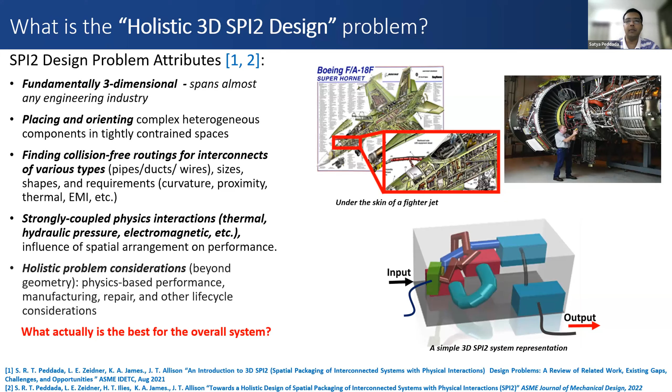Just getting into why is it a costly bottleneck across many industries? Current practice, if you see lots of industries, they have advanced knowledge and tools for simulation, design automation. But the thing is, for complex systems design at larger scales, we basically break up the problem into different parts. So is it possible to have, in 5 to 10 years down the road, simulation software or something where it can spatially package and find various configurations for a given system for different system performance metrics? Is it possible to do that? So that's something that SPI2 can offer.

The issue that happens with most of the industries is when it comes to actual design of complex systems, they depend a lot on manual decisions. For example, how do you make sure that you fit, take an aircraft, how do you assemble the aircraft? Lots of conventional methods are used where there's a lot of difficult things happen when you need to maintain or repair such systems, and you need to just throw away those systems if something is not proper. So how do you make sure that even repair and maintenance can be done properly and spatially packaged in such a way that all these different life cycle considerations are also met?

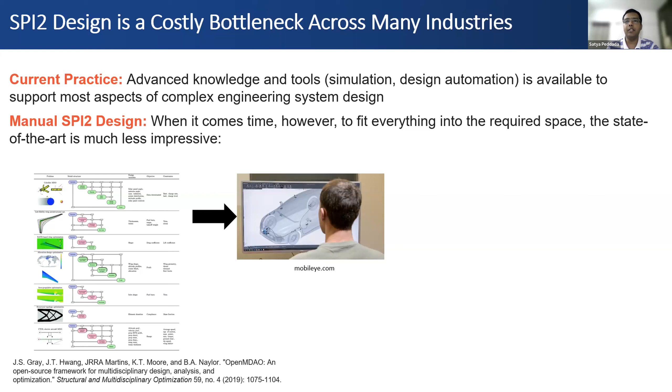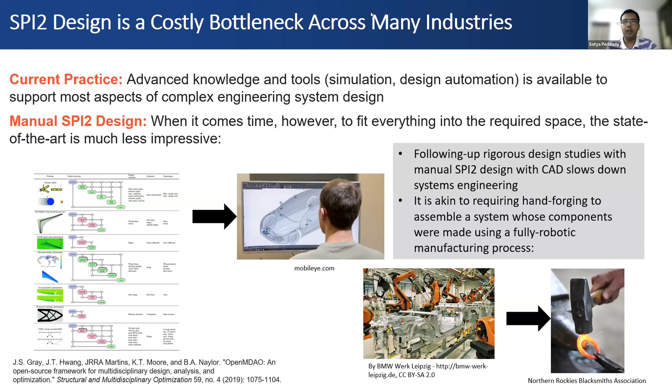At the same time, to conceive of different configurations of a given system manually is very difficult. The human cognitive space can only conceive of a few components and interconnects together, but when it goes to larger scale systems or complex systems with physics considerations, manual SPI2 design is really a bottleneck. And that's what we are basically facing nowadays. And for the current requirement of technology improvement, we need to have better softwares and better tools that can perform this SPI2 design research. And for example, why has the SPI2 design not progressed?

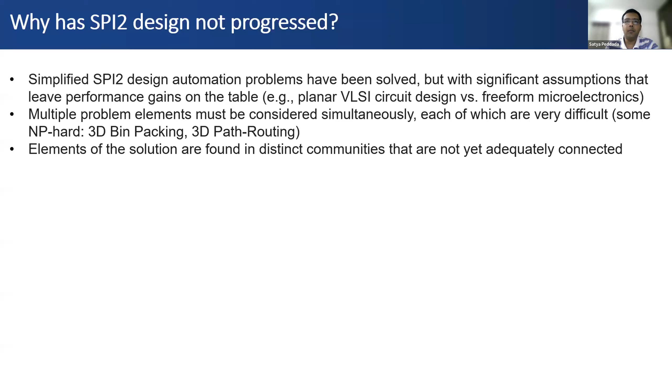Because most of the design automation problems which we solve are very simplified problems that have simple representations of the system, and also we don't generally consider multiple performance metrics together. Therefore, this is a very grand design engineering challenge. For example, considering both packing and routing together of components and interconnects is a very challenging problem, because packing, which is 3D bin packing, and 3D routing are NP-hard problems.

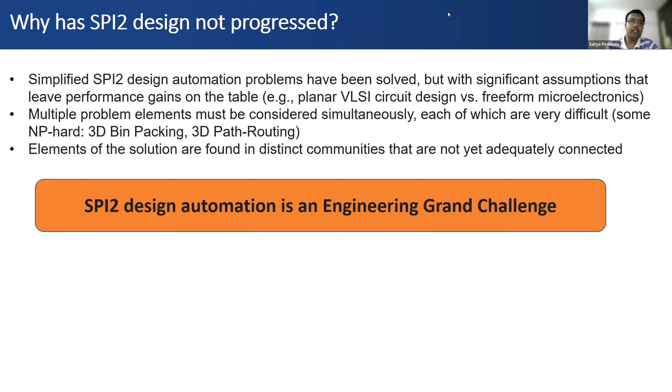Those familiar with mathematics know these are very difficult combinatorial problems. So how do you make sure that we find design representations where packing and routing can be done simultaneously? Both discrete and continuous ways of solving this problem are required in this case.

One good reason for optimism is that over the last few years at Illinois and with our partners, we found a method where we can represent a given SPI2 system, its components and interconnects in space, as a spatial graph. The advantage is you can represent components as nodes and interconnects as edges of that graph.

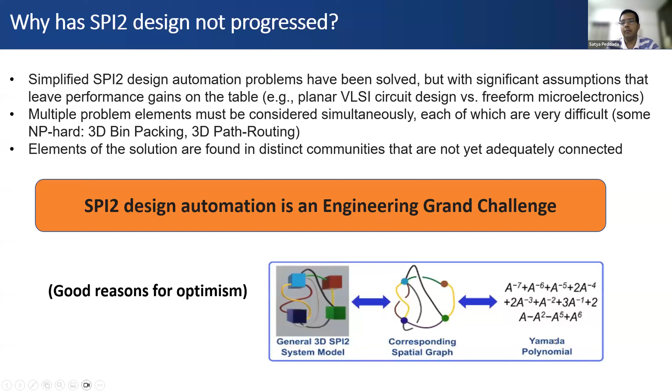That graph can be projected onto a 2D plane with crossings as shown here. Another advantage of this representation is it can be written as a unique polynomial, so you can enumerate various configurations of a given system by enumerating the graphs, and check if the graphs are isomorphic by comparing their Yamada polynomials, a mathematical polynomial from knot theory.

So this is one interesting way we have made progress in this design, SPI2 design automation.

Going back several decades, previous SPI2 design automation involved looking at the packing problem separately, work done by Professor Fadel and Professor Cagan, who are really well known in the design research community. From 1996 to 2008, packing and routing was studied extensively by Professor Jonathan Cagan.

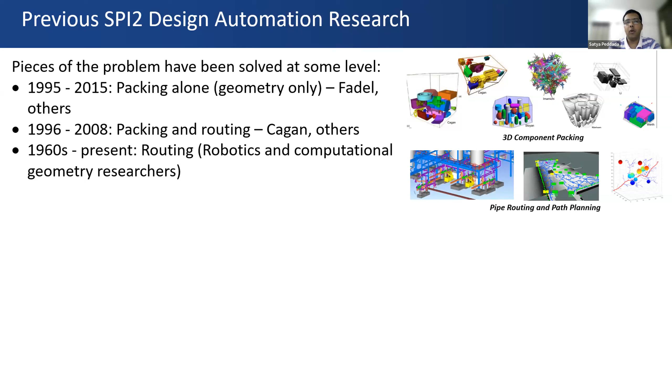From the 1960s, we have been solving many routing problems, both in robotics and computational geometry. But it's been solved separately in different cases like 3D path planning or chemical process plant layout routing, and interference problems, like non-overlapping of different components, 3D geometry interference problems, have been solved for decades.

What's now interesting is that from 2010 to present, we are seeing multi-physics topology optimization problems and geometry projection methods coming up. Professor Norato, who is also well known in this design research area, is looking at these geometry projection methods. One interesting point is that conventional topology optimization methods yield organic structures which are very difficult to manufacture.

But when we use geometry projection methods, those methods use stock materials like bars or solid objects as the primitives. When you do the topology optimization, the object shapes remain the same. That's the advantage with geometry projection methods for SPI2 design.

That's the connection: in an SPI2 design problem, you have components and interconnects. When you optimize them in space, as they move in space, optimizing overall area or volume with respect to physics, geometry projection methods work well since they preserve the shape of the objects and the shape of the tubes or interconnects. That's where we got inspiration to use that method for SPI2 design research.

I'll describe in more detail later why it's important. Each of these different independent problems, like packing, routing, physics considerations, and topology optimization, will be combined in SPI2 design automation research, which is what has happened in the past few years at Illinois. We are trying to solve this problem more comprehensively at larger scales for industry relevant systems.

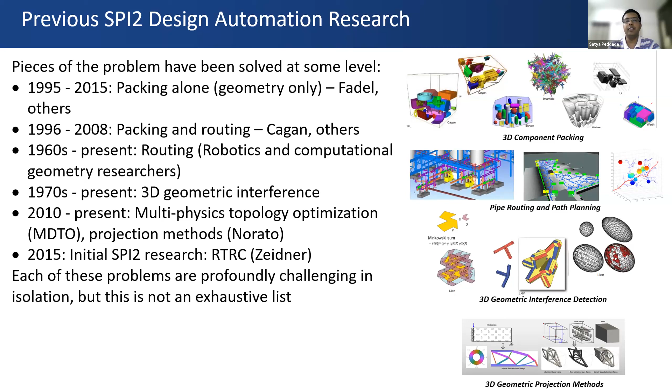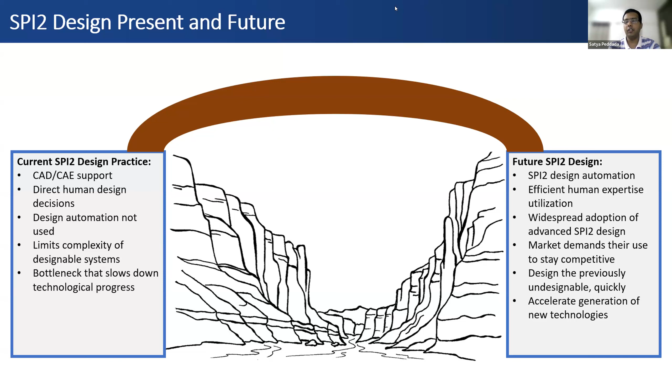But what we are looking into for the future is design tools for SPI2 that can support exploration of new configurations quickly and adoption of these tools into industry, which can accelerate the generation of new technologies and their adoption into the system. So there's a big chasm that needs to be covered quickly.

One design representation breakthrough we have achieved at Illinois addresses what makes SPI2 design really hard: you have continuous design decisions, which include how you place components in different positions while optimizing overall packaging area, what shape the components take, and how you orient them. These are all continuous design decisions.

At the same time, there are spatial topological changes. For example, if there are two interconnects, should one go under or over the other, or if there are hollow objects, should it go through or around them? These are discrete decisions. So how do you make sure you take care of all these decisions?

So you need a design representation that can support that. In knot theory, we have found something called spatial graphs, which can distinguish between two different spatial configurations. For example, on your left you see a spatial configuration S1, and S2 on the right. Both have the same connectivity, meaning the components connect to the same interconnects, but both have different spatial topologies. For example, interconnect 1 and 2 here are entangled, and unless you cut it, you can't get the new configuration like in S2. So these are the topological decisions I'm talking about that need to be taken care of while optimizing such systems.

And again, if you see another layout here, an interconnect is going from A through B to C, and there's another interconnect going outside this hollow object B. So these are again topological decisions that are discrete.

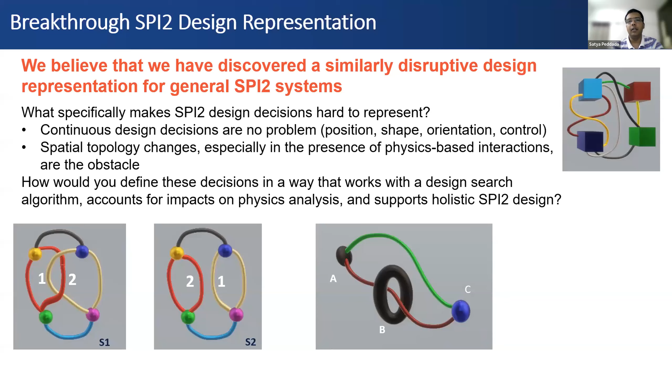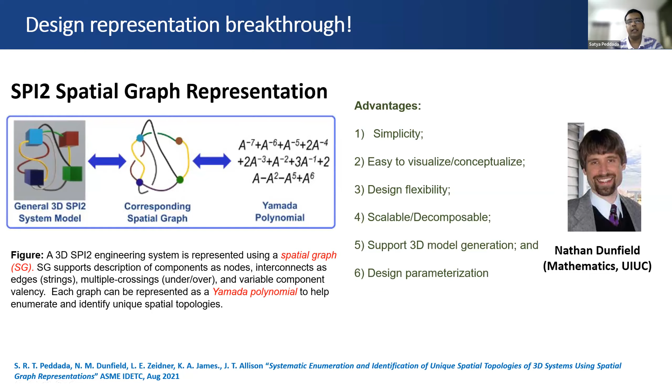So how do you make sure that while you optimize the locations of the components, you also find new configurations with different topologies? With the help of a mathematics professor at UIUC, Professor Nathan Dunfield, we came up with this design representation where we can represent a given SPI2 system with a spatial graph and enumerate all the graphs for the given system, and then optimize each of those graphs with respect to its spatial, physical, and other design considerations. So before we go into the two-stage framework, which is one viable framework—in the future there might be other viable frameworks for SPI2 design automation—this is just one example which we took in the paper that we explored a lot.

The main design optimization problem here has objectives that include system utility, for example overall volumetric density or the physics performance of a certain system, or other considerations.

And the constraints for an SPI2 problem are geometric and topological, functional, failure modes need to be satisfied, assembly and disassembly constraints—like how do you assemble the object when you're packaging it—and accessibility constraints, like is the component accessible for repair, and how do you make sure that constraint is met, and even manufacturability. Once you design a system, how easy is it to manufacture and put into production?

And the design decisions are, like I said, topological decisions, which are discrete. Continuous decisions include locations, sizing of the components, shapes, pipe sizes and so on, orientation, control of the flow of fluids, and other tuning parameters.

So this problem basically shows how lots of engineering disciplines need to be integrated in order to solve this very challenging problem together. This is just an example of how many disciplines we're currently integrating, with lots of researchers focusing on this problem as research goes in this direction.

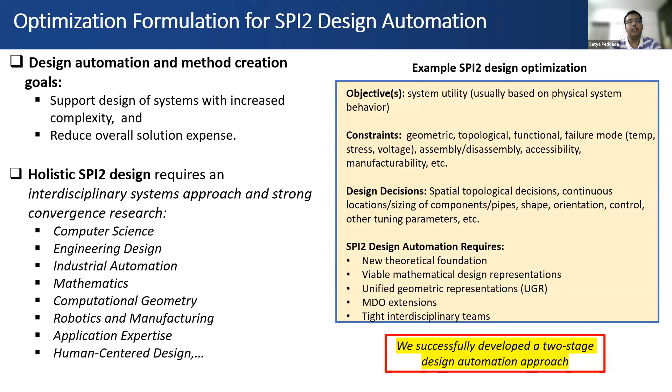Coming to one viable method to solve this SPI2 design problem: let's say we have a given system where a user provides the component shapes, geometries, and the connectivity of the system. What we do is, in stage one, we take the initial configuration and use spatial graphs to enumerate different discrete configurations.

And in stage two, we take each configuration and apply a geometric projection topology optimization method to optimize its overall volume with respect to physics considerations. So I'll quickly go through what stage one and stage two are.

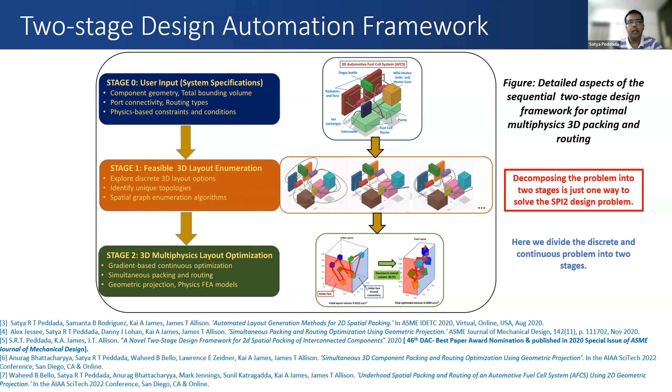The reason we separate this optimization problem into two stages is that stage one takes care of the discrete part, where we enumerate as far as possible different unique configurations or topologies. Then each configuration that is unique in stage one is taken into stage two for continuous multi-physics layout optimization. There's a journal paper in JMD that we published, where I'm the lead author, and you can look into that for more detail about this two-stage design automation framework.

In stage one, if you take a given configuration, what we do is enumerate it. One simple example is in this configuration you have different classes, and each class is a unique configuration. For example, class one—all these layouts are the same configuration, because this one has zero crossings, this one has one crossing, but if you just twist it in space, you get this configuration. So it's the same topology, but class 1 and class 2 are different topologies. Unless you cut the wire, you can't get this configuration.

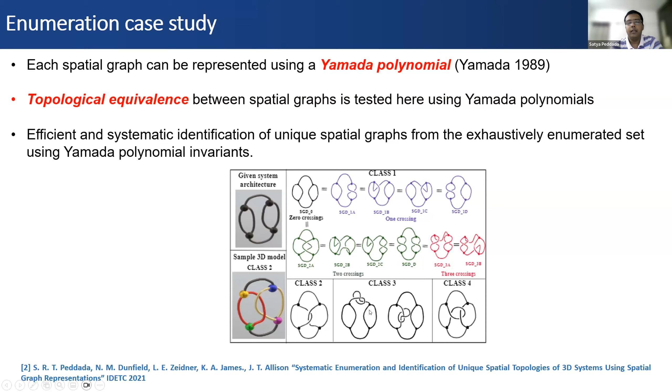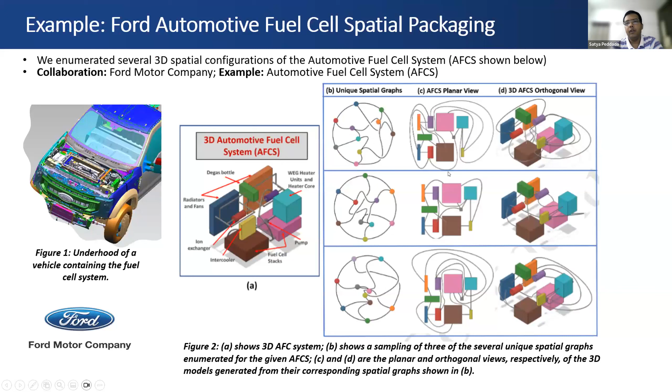So what we did is use some mathematical techniques to enumerate such spatial topologies, which are discrete, for each configuration. Then we applied it to a Ford fuel cell packaging problem. Here you see a fuel cell—we enumerated different spatial graphs of it, which are unique, and got different 3D configurations for each one.

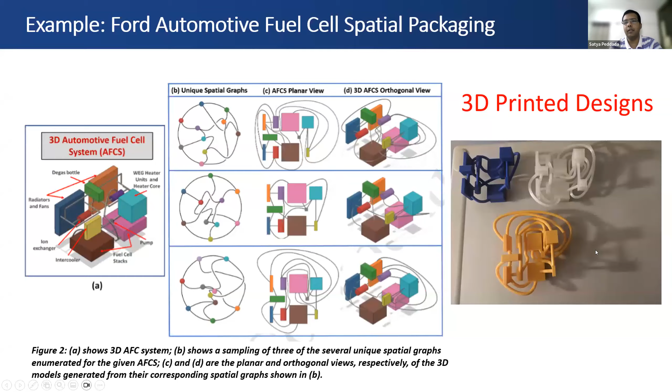Stage 2 is where once we get the unique configurations, we apply topology optimization using geometry projection. Conventional topology optimizations give organic structures, but what we want to do is preserve the component geometry in SPI2 continuous optimization. Geometry projection is a method where primitive objects, which are solids, are projected onto a mesh.

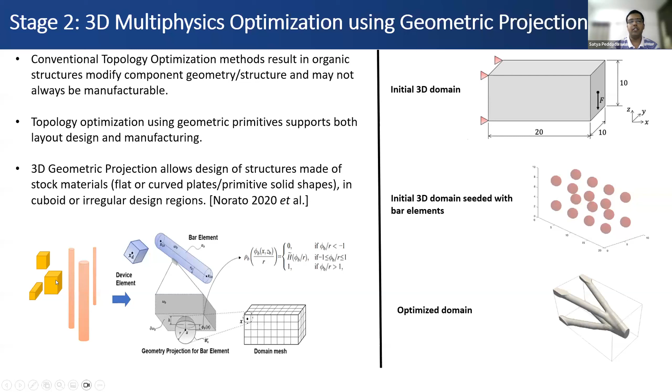For a SPI2 system, we have components and bars which represent the system. Here is a simple optimization formulation where we want to optimize the bounding box volume of a system, where intersections between different components and interconnects are made sure that they don't intersect. So you have device constraints, interconnect segment device constraints, and all other combinations.

At the same time, physics constraints, like making sure that no temperature of the device is going beyond limit, or head loss constraints are maintained when fluid is passing, fluid temperature, and all those things. So here is a very simple example.

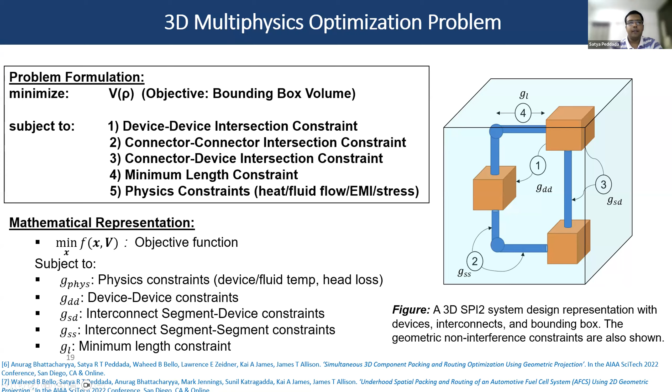I have more complex examples of real world systems, like I showed the Ford automotive system example. But here is a simple system where we take a 3-component system with interconnects, and then we optimize it with topology optimization method using geometry projection in order to get different layouts for different constraints.

For example, if the head loss constraint is 2.5 meters, it makes sure that it is met. And if there's no head loss constraint, you see components that are much closer to each other. Similarly, if you have an 8-component system, when you optimize it for head loss, you see.

Oh, excuse me, Satya. Please be kindly reminded, each speaker has at most 20 minutes. Sure, thank you. Yeah.

And so how far have I gotten? Yeah, I'll try to quickly finish.

This is a simple example of how the optimizer takes a smart decision depending on the constraints, what kind of result it gives. You can just imagine with components of different geometries and shapes and different interconnects, how we get different spatial package solutions. That's something I wanted to show here quickly with this example.

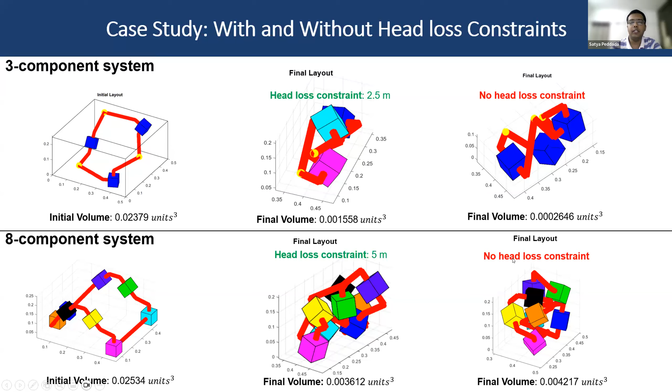Lots of details are there in the paper and other related papers with respect to SPI2 design research, so you can look at them. In conclusion, I would say that holistic SPI2 design automation is a vast research area that's currently expanding, cutting across multiple disciplines.

Here's one method which we presented that optimizes the component locations and the interconnect routing paths based on physics performance. But lots of other methods are possible which can be applied for industry-relevant applications.

Future research questions include what design optimization frameworks can be newly framed, how does the problem difficulty scale with respect to number of components or interconnects, and what kind of new parameterizations or representations are required, etc.

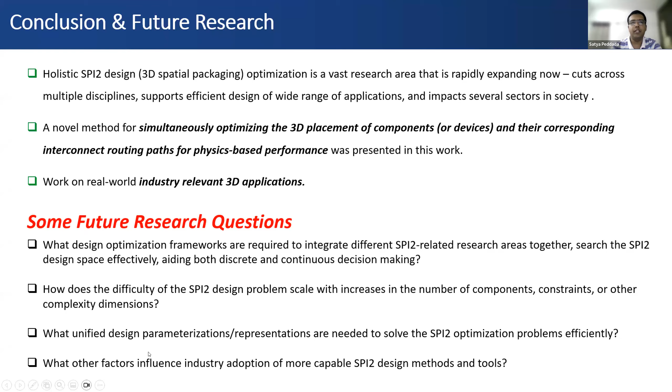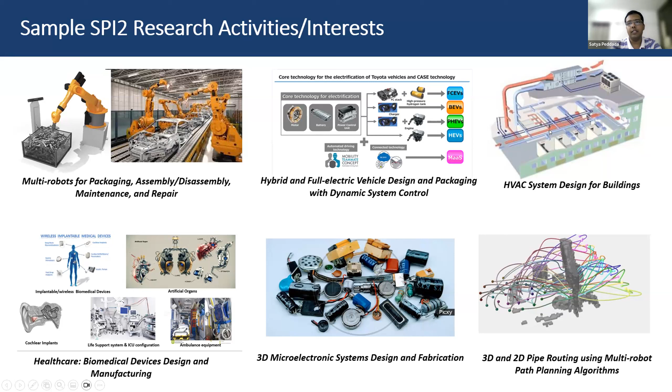As a quick snapshot of some SPI2 research activities at Illinois and its other partners, applications include various systems, microelectronics, HVAC system design for buildings. So it spans all over, even biomedical device design, etc.

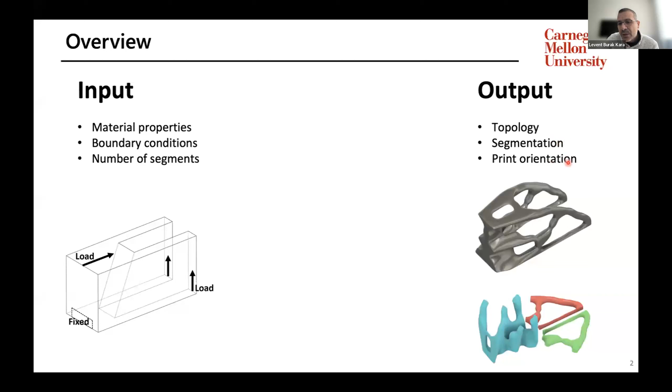This is in contrast to monolithic structures that are pretty pervasive in additive. But with these inputs, we are hoping to produce an output in which we have a single topology and a segmentation of that topology into however many segments the user has provided as input. For each of the segments, there's going to be a print orientation that is also an output. So in this work, the topology, the segments, and the print orientation for each segment are concurrently optimized rather than sequentially. So how is this achieved?

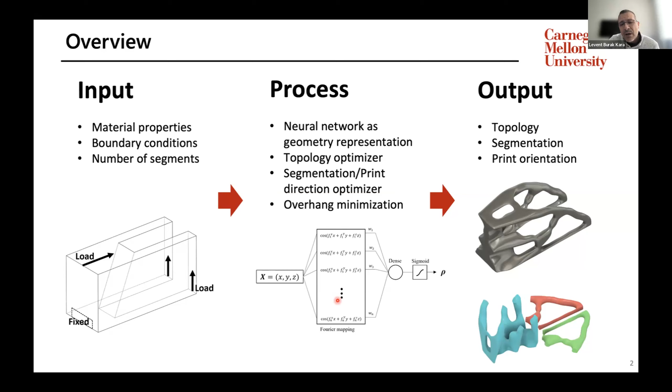We have 3 neural networks working in unison to produce a material distribution hypothesis that is then minimized across an objective function that we will talk about. Uniquely, we're using neural networks as a geometry representation. This allows us to decouple the complexity, the degrees of freedom in the design domain, from the difficulties on the simulation side of things, for instance the finite element analysis that's needed. So we have this decoupling that's allowed through the neural network, and we're building off of the ideas that have been presented in the last 3 to 4 years.

Our neural network-based approach is based on Chandrasekhar and Suresh's group in real-time topology optimization using neural networks. These neural network approaches are not a data-driven approach. Rather, these are online methods that basically take the given problem and then try to optimize a structure using the neural network as the optimization engine.

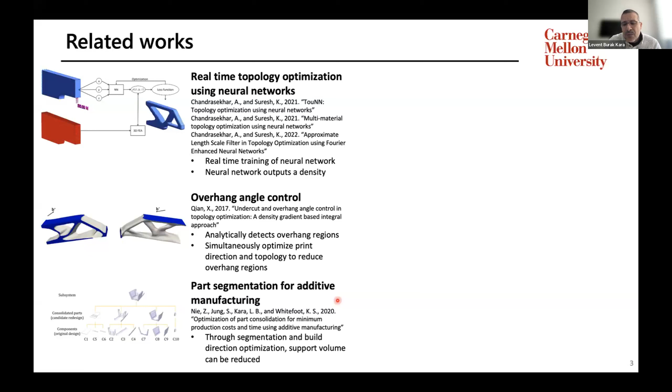There have been many works that try to design structures suitable for additive, primarily in overhang angle control, for instance, that minimizes the amount of overhang. We're also inspired by these works that try to minimize these quantities. Our past work in part segmentation for additive manufacturing is not redesigning the structures, but trying to find the proper segmentation, decomposition of an initial structure into its subgroups, and then optimizing their print orientation to create compact build volumes. So these are all pieces of work that inform the work we're about to present.

Also, topology optimization and its variants have been looking at using generative adversarial networks in order to produce topologies, and these are trained with previously established solutions. This work is in contrast to these data-driven approaches. Like I said, we're not using a data-driven approach, but rather an online approach.

Finally, there's existing commercial software that looks at some of the criteria that we're also interested in, like the total amount of support structure. However, these tend to be working for fixed orientations in the build chamber, and they're trying to optimize the support structure accordingly.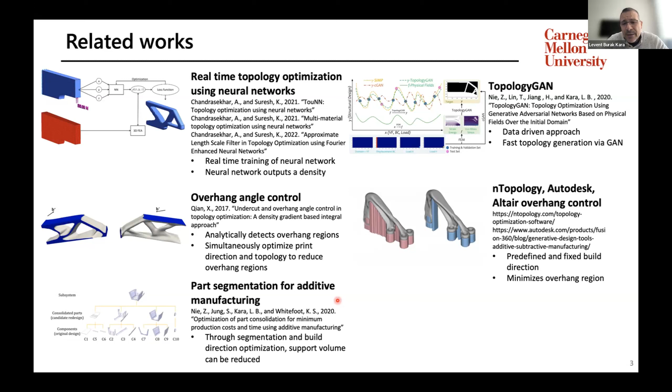The one thing I'll say is, even though our inductive bias is support structure minimization, overhang minimization, in real practical applications it is not always the case that one would want to minimize the support structures, because many times support structures can also be used as a conduit for heat conduction and so forth. But ours is kind of us taking a simplified approach to support structure minimization.

All right, so our work is primarily on this left-hand side, and we're kind of joining these works that were presented in the past by us and others.

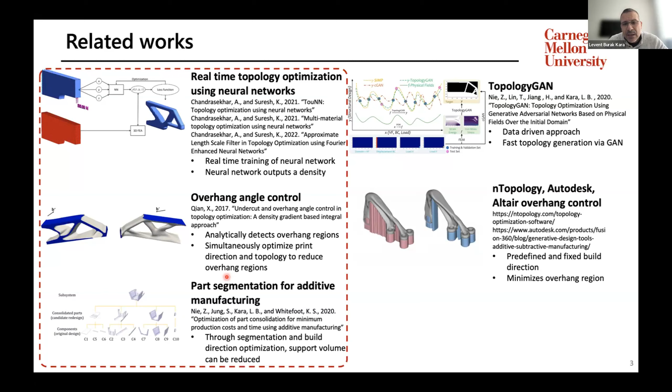Our main contributions, we believe, are an analytical solution to the density gradients that we obtain from the input-output relationship using the 3 neural networks. This allows us to create a fully differentiable pipeline where we have combined build direction, part segmentation, and topology optimization that is enabled. The different pieces of this architecture are modular. You can turn on and off different pieces, for instance to totally eliminate segmentation or prevent build direction optimization if needed.

Our architecture looks like this. Like I mentioned, it pulls together three different networks. The first network is a topology network that takes X, Y, Z spatial coordinates that we can sample in the Euclidean space, and then it will provide a density for each of the X, Y, Z points. So you can think about this as a material hypothesis generator.

The segmentation network looks very similar to the topology network. It takes as input XYZ domain coordinates, passes through a similar set of functions including Fourier layers, except it doesn't produce a density at the output, but creates a classification, basically a segmentation using the softmax layer for the segments. As I mentioned earlier, the number of segments is an input by the user, so it is not a number that is automatically determined by the system.

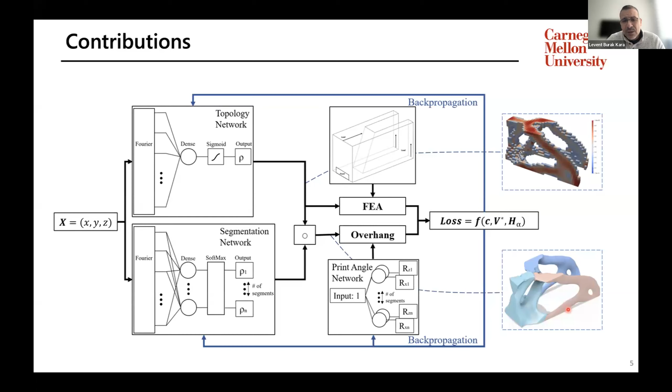So the two networks, the topology network and segmentation network, are inspired by these two great pieces of work that have been published rather recently. We're joining them together and then combining a print angle network to achieve this concurrent optimization.

But if we were to go under the hood in these networks, the topology network is using a Fourier layer to represent the geometry. Basically, for any XYZ point, we have multiple different filters, cosine and sine functions at different frequencies, that allow us to join their outputs through weights, linear layers, into a dense MLP. Then from there, we go into a sigmoid function to determine solid or void.

The segmentation network is using a very similar principle, similar geometry representation, but the last layer is a softmax layer that allows us to do some segmentation on any given XYZ.

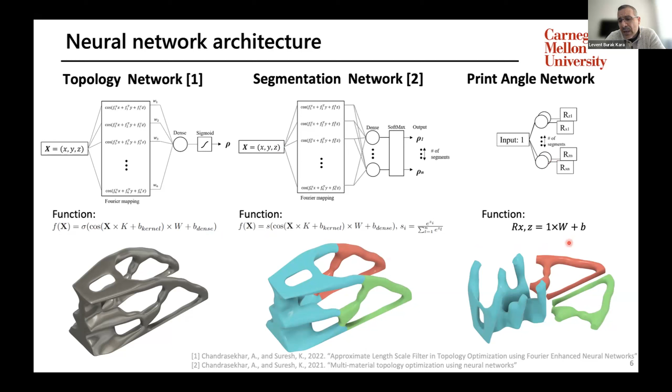The final network is the print direction optimization, where the input to that network is actually a simple bias term of 1, and we're optimizing the weights associated with the Euler angles in order to minimize the joint loss function. The mathematical details are provided here. They are very similar in the two networks, and the last print angle is actually quite simple.

We think an important observation and contribution we had was to show that the analytical gradients that we can compute throughout the topology network as well as the segmentation network, we got similar results if we were to use automatic differentiation. So the results you're seeing here with the red and blue arrows are the differences in automatic differentiation versus using the analytical gradients in the gradient calculations.

These two different halves are both aimed at finding the density gradient so that we can drive topology optimization. But this is just almost like an internal validation approach to show that the analytical gradients are actually valid in this case. However, in practice, we saw that it doesn't make a huge difference whether we use the analytical gradients or the automatic differentiation for density and gradient calculations. Performance-wise, they're actually pretty negligible. The differences between them is pretty negligible.

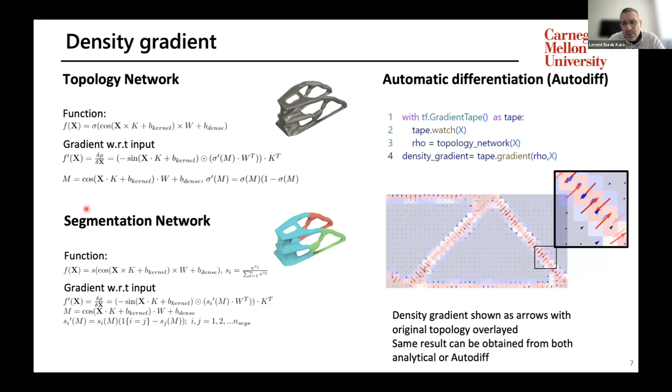At the heart of our computations for compliance, we used a SIMP-like approach where we are using finite element analysis that is applied on a mesh grid that is independent of the original XYZ points that the networks are taking as input. In fact, this decoupling of the geometry representation from the analysis domain is one of the unique features of this neural network approach.

And we're leveraging this previously presented idea. For passive elements where domain materials should not appear, we can enforce that with a simple L1 loss in the neural network, as well as creating symmetrical results. We also attach another formula that gets incorporated into the network. So symmetry constraints as well as passive element enforcement is rather straightforward with these neural network representations.

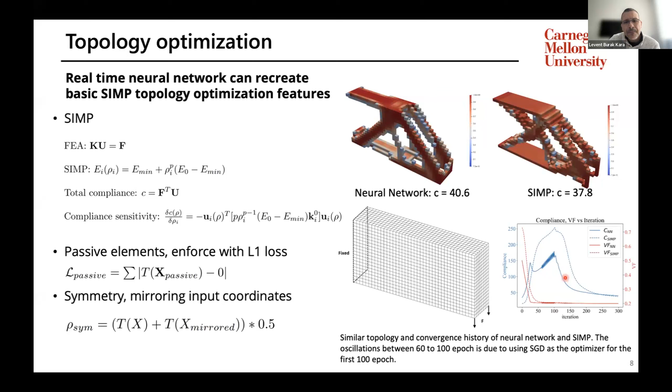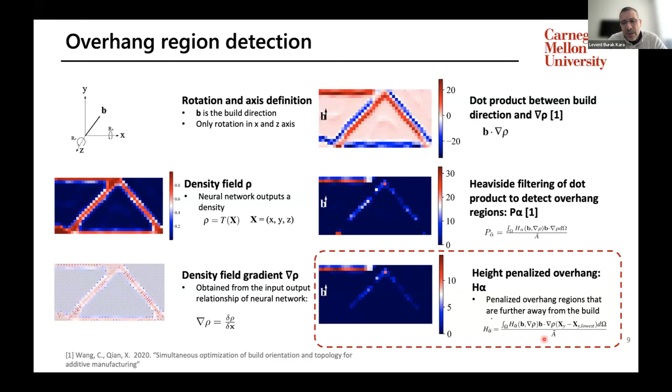So the angle for printing is taken here as a parameter that allows us to formulate the overall support structure volume, and create a differentiable function that we can use for backpropagation. This is a slight improvement extension over what has already been published. Finally, the loss function, as I mentioned, is looking at compliance. It tries to minimize the overall compliance.

We have a target volume fraction as a constraint, and we're trying to meet that as closely as possible. Finally, we're trying to minimize the overall height penalized overhang area. So these three terms constitute the loss function, and the gradients of the density can be computed relative to this loss function using the information we just shared.

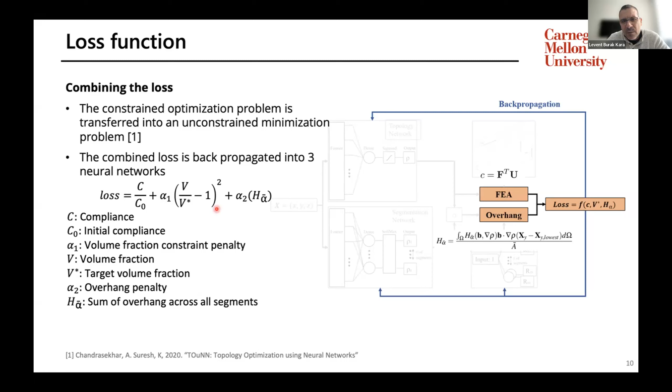So what happens if we use this height penalization versus if you don't? Without height penalization, the height penalization essentially means the following: if our system is going to create overhangs, how far should those overhangs be from the build plate is the question that this is answering.

Because this is going to impact the amount of support structure that needs to be built underneath, with our system it is able to penalize tall areas in which overhang is likely to appear. For instance, our system is creating a gap here, but if you don't account for that height, sometimes you create these bridges which will require quite a bit of support structure, a major cost driver. So that slight extension allows us to capture these nuances in support structure generation.

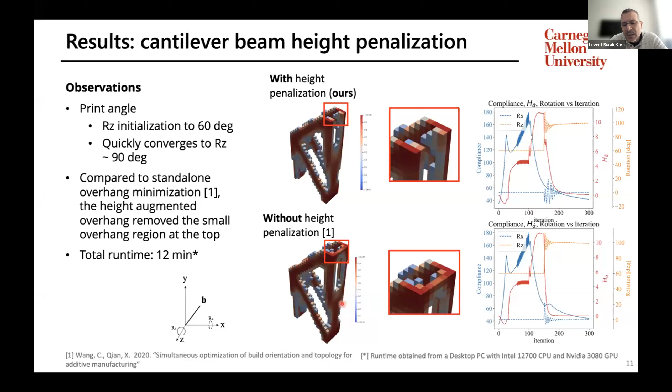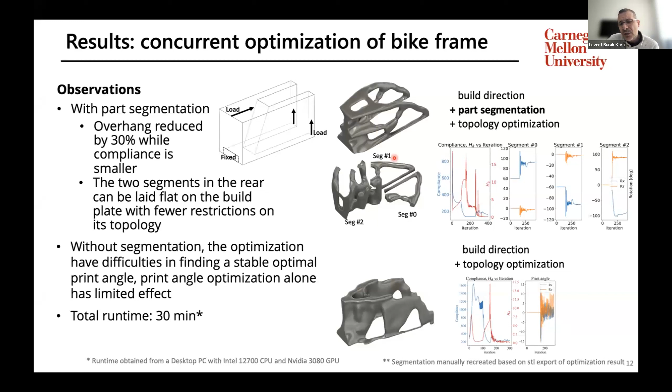Obviously, there's no free lunch. The fact that we're creating these segments and optimizing each concurrently does not mean that this overall design is better than a monolithic version. At a minimum, we have to now pay some price for assembly and generating those assembly surfaces for sure. So there's a trade-off, but we think this multi-segment optimization may be an interesting contribution to the community.

Finally, here are some results showing the conventional approach for height minimization as well as compliance minimization versus a concurrent approach where things are done jointly. The lower the C, the better. The lower the H, the better. In these two halves, you see that our approach is trading off compliance.

So it is achieving worse compliance in hopes to minimize support structure. You can definitely see a trade-off happening here, because unlike the case where we are doing conventional optimization, the compliance values can be further minimized. So ours is creating a trade-off between those two forces, if you will.

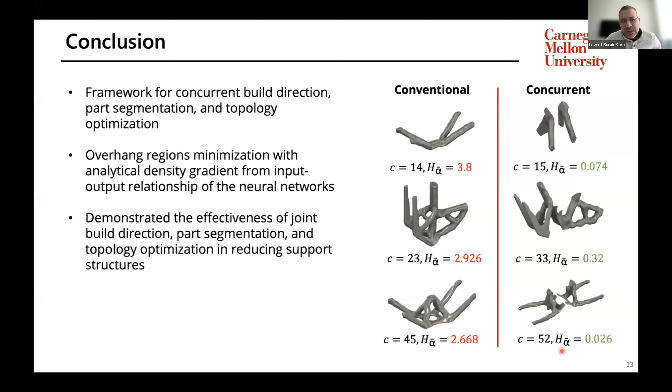Some of the limitations: as I mentioned, the segmented parts require assembly for sure, so there's going to be additional work needed to design the mating surfaces that go into a multi-segment segmentation. We are currently working on this aspect to fully automate the assembly instructions also. It is a hard problem, but it is something that is actually quite exciting.

The other two things I just want to mention that we think are tied to what we just presented: in a recent work just accepted to Journal of Mechanical Design, we are showing how a neural network-based topology optimization's convergence can be significantly accelerated by providing input fields that have to do with the initial unoptimized design domain. Uniquely, if we were to provide, for instance, the strain energy as a conditioning field, the neural network no longer takes as input just XY or XYZ, but also the strain energy field as part of its input. We see that convergence can be accelerated.

So this was a discovery that we came across when we were trying to make the convergence faster. The overall final results, the compliance, is probably comparable between using the initial field versus not. But if we were to look at a target compliance, we can meet that in a much fewer number of epochs compared to not using that kind of initial field.

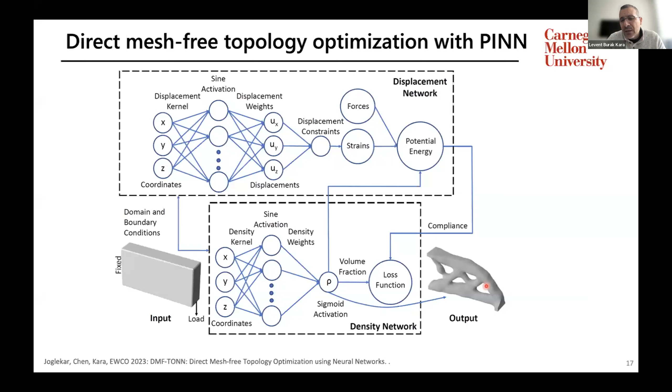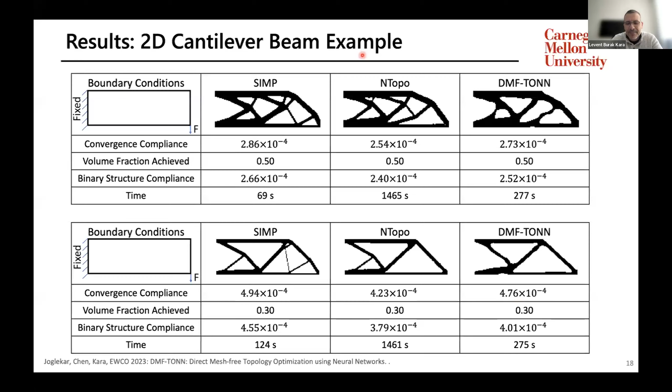Thank you. So hopefully everyone can see my screen. Great.

Today, I was invited to talk about deep generative models in engineering design, specifically this paper with my students, Lyle, who is the first author, and Amin, where we talked about a review of how deep generative models are used in different engineering applications, with a special focus on topology optimization.

However, when I was preparing this talk, I felt that a lot has happened between the time the paper was published. So I thought I'll talk about a few other things, specifically around deep generative models and metrics for deep generative models—both of them published in the design community. And then also some recent work around using diffusion models and diffusion optimization models, which were published in AAAI and will be published in NeurIPS 2023.

Great, so let's start with what's our overarching motivation. The overarching motivation is, how can AI enable humans to create better designs faster? And specifically, we will be talking about generative AI or deep generative models.

Now, just to give you a quick introduction for people who are new to this field: generative AI is a field of artificial intelligence that uses algorithms to create new and original content. It could be text, images, videos, or other media. And this definition is provided by ChatGPT, which is itself a type of generative AI model.

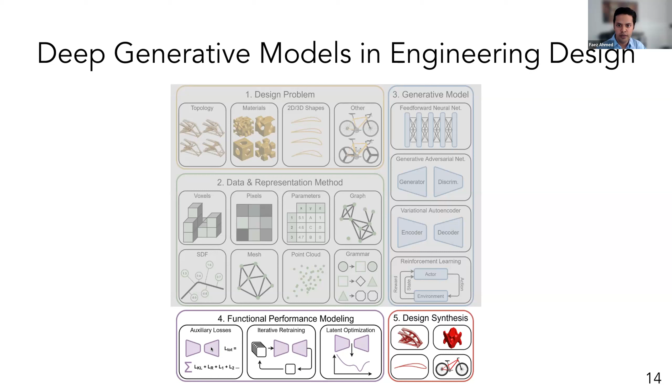There are some things people care about in the literature: iterative retraining, latent space optimization, and auxiliary loss functions, which can improve the training, say for manufacturability or compliance, in the case of topology optimization.

Since this webinar is about topology optimization, I wanted to talk about why should generative AI care about topology optimization, and why should topology optimization care about generative AI? I'll give you some preliminary examples of things we have discovered.

Just a quick overview: when we talk about structural topology optimization, the standard problem, shown here as a 2D example, is that you are given some boundaries, you apply a load, you want say 40% of the material, and you run a standard optimization solver. SIMP is a very popular one. You can use implicit functions, there's a bunch of other methods, and you find the optimal distribution of material in this space. This works quite well. There are some parameters like penalization and filtering that you have to fix.

But every time you run an optimization, you almost always start from scratch, which means that over time, you are always ignoring all the past optimization runs that you have done.

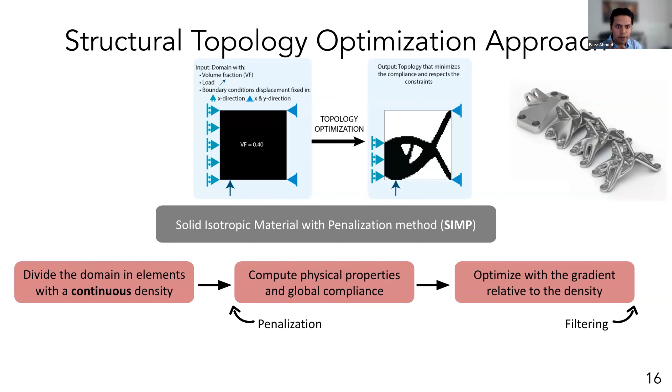Basically, in some sense, it's learning from experience, where it says I have seen so-and-so boundary conditions being applied, and since it's a data-driven approach, I know that given this new condition, most likely the structure will be so-and-so.

There are many approaches within this that we talk about in the paper, like VAEs, GANs, super resolution, iterative training, human guidance, real-time synthesis where you're generating things in real time while changing boundary conditions, physics-based models, and so on.

A lot of times, the overall goal is: can we get better designs faster? Once trained, these models can produce designs very quickly, especially for high-dimensional data. I'll show you some results for that. Also, they can uncover novel and unconventional designs, reduce manual input, and other things.

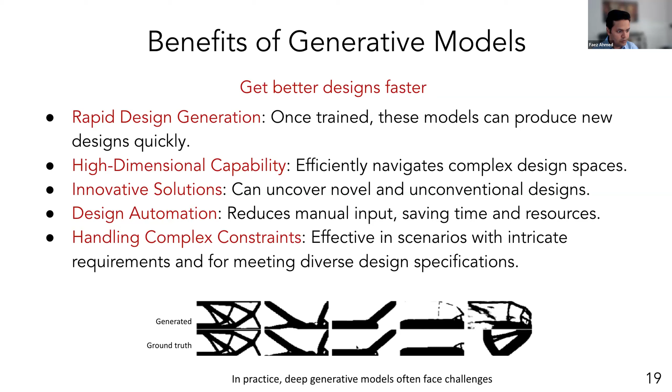There are many challenges behind running these data-driven approaches. Generalizability is the biggest challenge. Some other challenges are we have to define design performance, including functional performance, which is quite critical. The data sets available these days are generally very small, and as a result, since these data-driven approaches depend on data, there is a lack of performance. Finally, we want to create designs that are very novel and not just trying to exactly mimic the optimal solution, and we want them to be fabricated—they should be physically feasible.

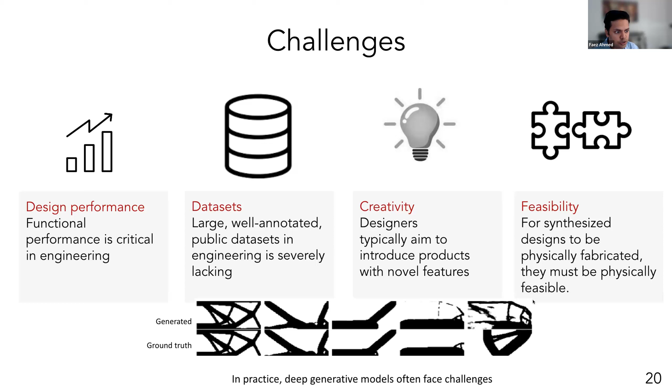One of the challenges on why these models struggle is that most generative models are developed for multimedia domains like images and text, and their goal is basically some notion of statistical similarity. So they are looking at KL divergence, trying to be as similar to the training data as possible.

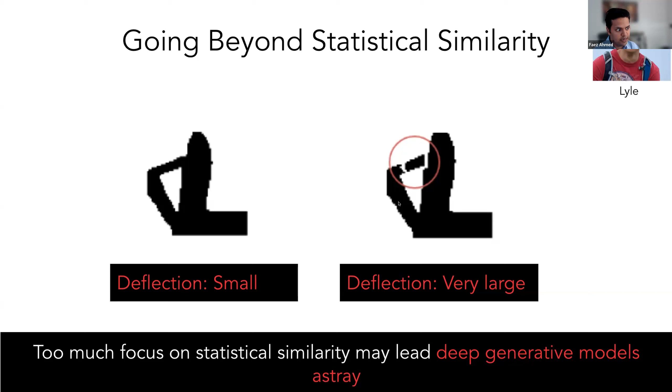In a recent work, we started looking at this problem of statistical similarity, and you can see two topologies which look very similar in the pixel space can have huge difference in the performance space. And it's not just the performance space, there are many other things like constraints, conditioning requirements, and so on.

This is a paper published in CAD where we look at many different metrics that people should care about, not only in training the models, effectively telling the models that you have to think beyond statistical similarity, but also evaluating the models on how we evaluate, for example, the diversity of the design.

Inspired by these, we started thinking about creating a generative model which knows more about performance and is also somewhat aware of the constraints. And we started looking into this idea of diffusion models.

The way diffusion models work, and this is like if you're using any text to image model, most likely they are some form of diffusion model. It starts with the design, incrementally adds noise until it gets complete noise, and you train a neural network to denoise it at every step. Unlike VAEs and GANs, this is an incremental approach where you go step by step and slowly improve the design from complete noise. So we can train these diffusion models.

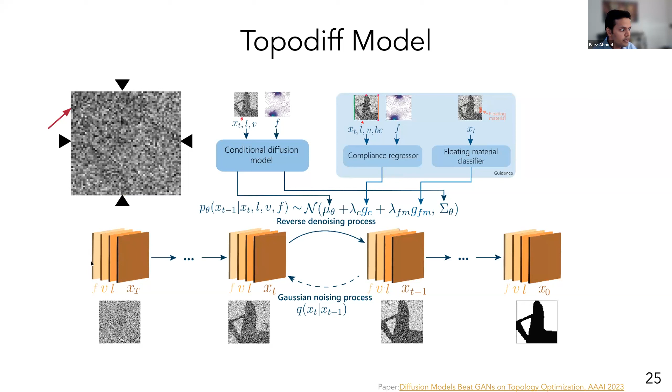This was inspiring, but again, there are issues with it because this approach is quite slow, it's an incremental approach. So we started thinking about how to speed it up. And when talking to colleagues, a lot of times people say, why do you even need generative models? Why not just use topology optimization? And the answer for us was, well, why not use topology optimization?

So we came up with this new approach where instead of training these models on optimized topologies, the final optimal topologies, we would use a separate approach where we learn from the path that the optimization took to reach the optimal topology. In this case, the top line is the path any optimizer takes. For demonstration, we have used SIMP.

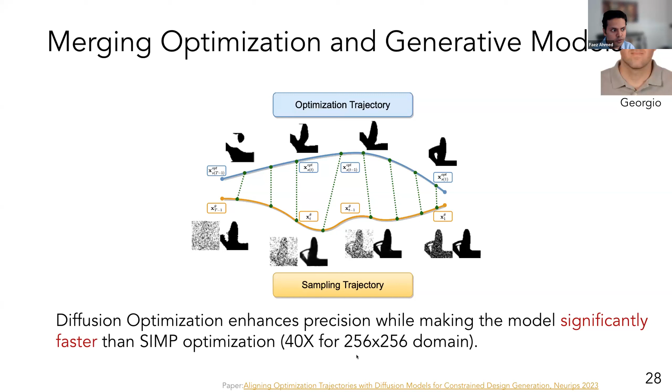SIMP goes from complete material to an optimal topology, and the diffusion model goes from complete noise to an optimal topology. We showed a new way to map these two together, and the model at training time learns from entire paths. We found that this can make the topology generative model significantly faster and more accurate. In the case of 256 by 256 resolution, it's almost 40 times faster than SIMP. Having said that, one is running on GPU and one on CPU, so this 40x should be taken with a grain of salt.

So that was one approach. Effectively, what we're doing is taking optimization and merging it inside the generative model, and there are a lot of tricks on how we do this. The next thing we looked at is how to use the generative model to augment topology optimization, meaning the generative model gives the initial point or solution from which SIMP starts. We find that with very few optimization steps, this can enhance the results of either doing just SIMP or just generative models.

As a result, we have found some very good results. The paper is online. One thing I want to highlight is that a lot of it is data-driven, and the restriction is that we are using small and restricted data. So we have made all our data sets public, including 100,000 and 120,000 topologies for this one. For low and high resolution, we are also creating another data set with more than 1 million topologies, which will be made public.

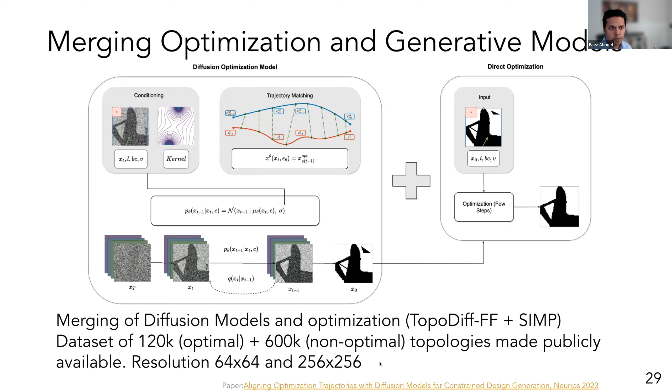The goal is that eventually we come up with very powerful generative models which can enhance any optimization approach out there. These are some results where we see it can generate near-optimal topologies even for unseen conditions. In terms of time difference, when resolution goes from 64x64 to 256x256, the time taken by SIMP increases about 16 times, but the diffusion model only increases by 4 times. This matters because once we go 3D and higher resolution, this will make a huge difference in time taken. You can also see a huge diversity of solutions -- within one generation, it can produce multiple topologies that look very different for the same boundary conditions. Each row shows all the topologies generated for the same boundary conditions.

Quick takeaways: generative AI plus optimization, combining generative models with optimization, is something we're very excited about, and we think it's a promising approach. We do need better data sets, models, and metrics, and there's a lot of good work going on in that space.

I started with why should topology optimization care. Deep generative models can help amortize the cost of optimization by learning from experience, and can effectively augment almost any topology optimization approach by giving a better initialization. They can also connect topology with hard-to-quantify objectives, when you want a topology which looks like your house, or objectives which are very subjective.

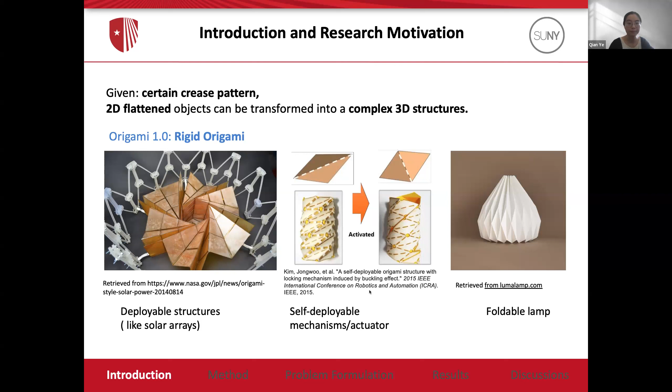One of the well-accepted methods is rigid origami. The key idea is to assume that the origami consists of rigid patches with flexible joints. Another well-adopted way is to model the origami as a truss structure. These methods are usually based on the assumption that the folding crease is straight and there's no in-plane deformation on the facet area.

Recently, the study of compliant origami that consists of curved folds is emerging. For example, when applying origami structures in robotics and other mechanical devices, curved folds are more desirable than conventional straight folds. This is because they are able to vary the amount of stiffness when interacting with different environments and objects. However, conventional rigid origami models do not consider the in-plane deformation and cannot simulate curved origami structures. Also, designing such compliant origami largely relies on the designer's intuition and experience.

Thus, in this work, what we want to do is aim to offer a solution to systematically model and optimize a compliant origami design in order to fulfill some engineering requirements.

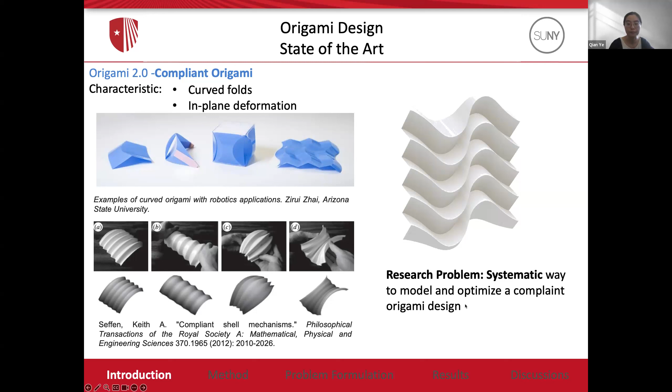Here is an overview of our method. Basically, we use a modified shell model to simulate the origami structure so that the in-plane stretching, out-of-plane bending, and shear deformation can be well captured. For the topology optimization part, we use a level set approach.

Here is a flowchart of our method. We first introduce the initial level set functions to represent the crease pattern, and we interpolate the geometry-related information to the shell model for finite element analysis. After evaluating the performance, we will do a sensitivity analysis and construct the velocity field to update the level set function and get a new crease pattern. These procedures will continue to repeat until converged to a solution.

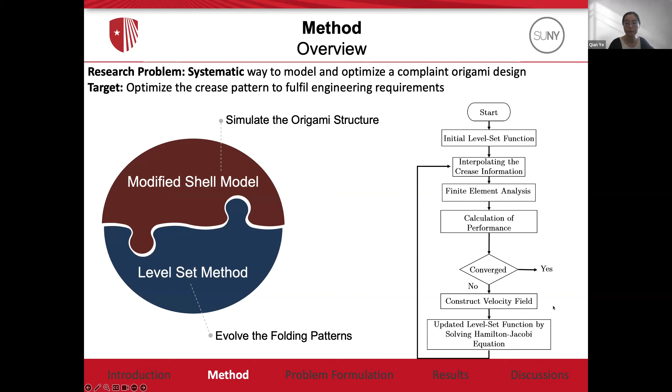Before we move to the detail about our method, I will quickly introduce the conventional level set approach for topology optimization. The level set function phi is defined in Euclidean space as an implicit function in one higher dimension. And the dynamics of this boundary evolution is governed by this Hamilton-Jacobi equation. The method has several benefits, including the clear representation of boundaries and the accuracy in calculating geometric variations.

Specifically, in representing origami structures, this means the level set method naturally gives us clear boundaries between folds and facets. And it is easy to adjust the curvatures and smoothness of the folding lines.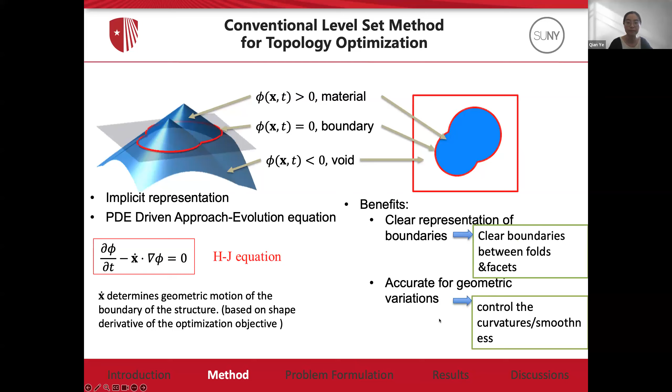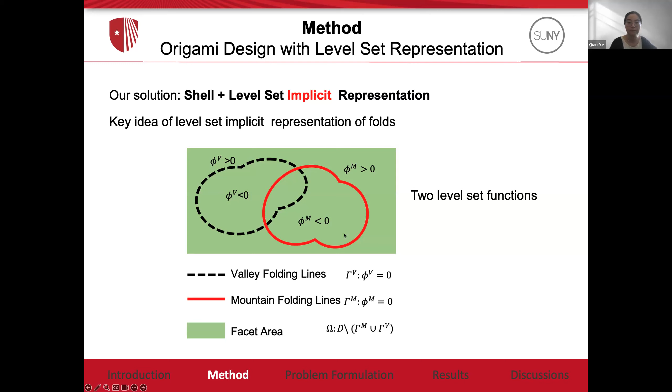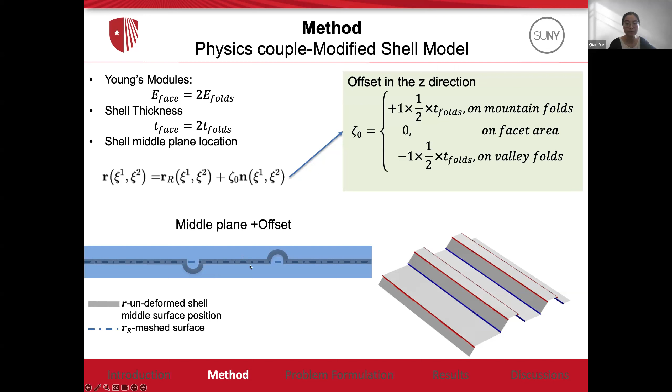For example, for a mountain fold, there will be a positive offset. For a valley fold, there will be a negative offset. It is well noticed that we use a smooth function to represent the folding area, such that we can guarantee a smooth transition through the thickness direction. We can see our method can handle not only regular straight folding lines, but also more complicated curved crease patterns.

We also want to design origami structures that have minimum crease numbers. In other words, the optimized structure can transfer force and displacement from the input area to the output by deforming the optimized origami.

Let's formulate the objective functions. The first part is a classic kinematic requirement, meaning the window area W would reach a target displacement U0.

The second part, J2, is a characteristic requirement, which we will discuss in detail in the next slides. And J3 is a total perimeter of the folding lines that controls how smooth this origami crease pattern is.

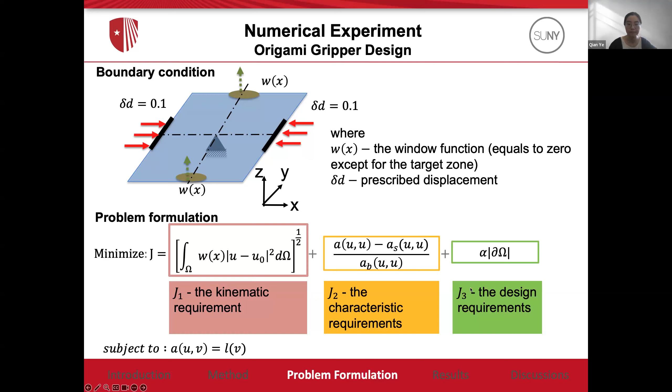Let's look into the physical meaning of J2. Once again, the objective of this part is to generate a pattern that makes the system work like an origami, namely, first we want the deformation to occur mainly in the area near the crease.

This is done by the upper equations. We also want the out-of-plane deformation to dominate. This is done by 1 over the bending energy, the total bending energy, shown on the bottom side of this equation.

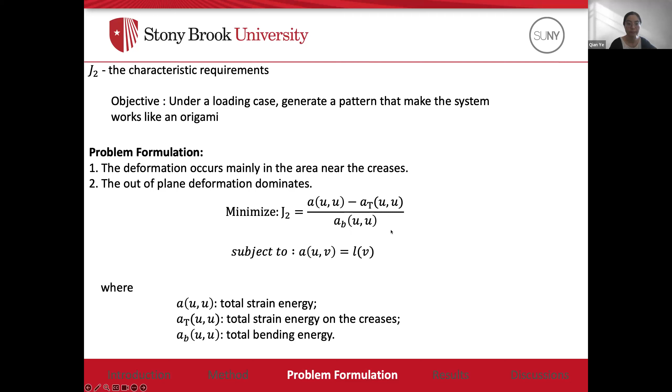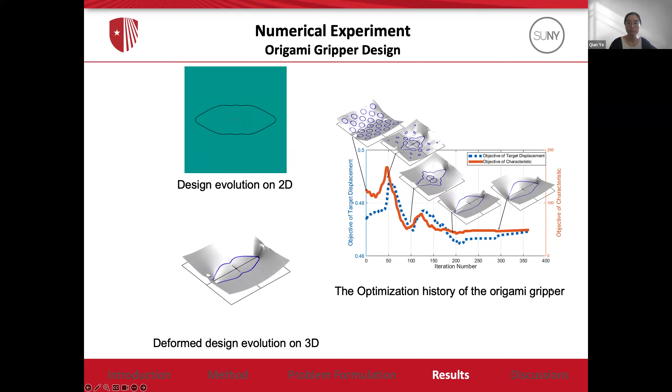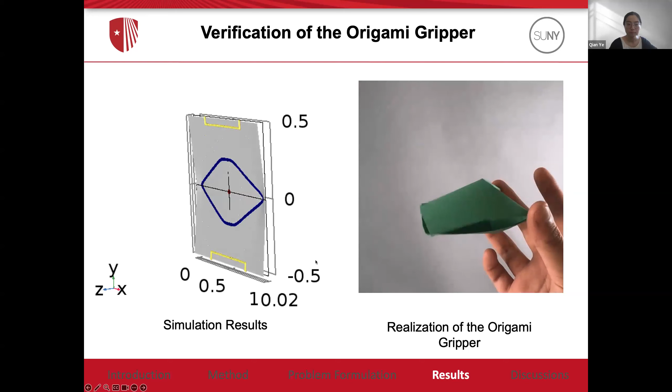The total initial boundary number of group B is the same as group A, and group C contains the largest number of initial folding lines. We can see that all three groups converge to a similar design.

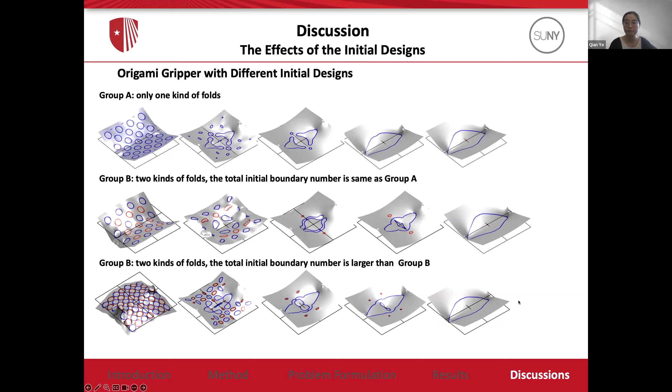Since we know one of the most challenging parts in this topology optimization problem is how we translate the behavior of origami structures into the objective function, here we would like to discuss more how the characteristic objective J2 works to solve this problem. Essentially, the characteristic objective is an energy function aiming for a design where the most deformation happens on the folding areas.

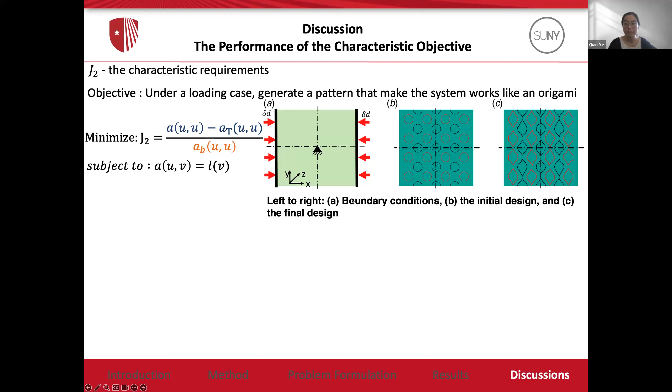Here is an example to show the performance of the objective J2. As shown in this equation, when we run this simulation, the objective function only contains the J2 part, under a linear elastic constraint.

The figure from left to right shows the applied boundary conditions, the initial design, and the final design. The design domain is the unit square, and we fix the center. In the x direction, we apply two prescribed displacements delta D, and we want to push the model moving toward the center.

The initial design consists of mountain and valley circular folding lines. With the effects of the objective, we can see that the final design changes from circles to diamond-like shapes.

We can observe that since the perimeter constraints are not applied here, we see a little zigzag on this final design.

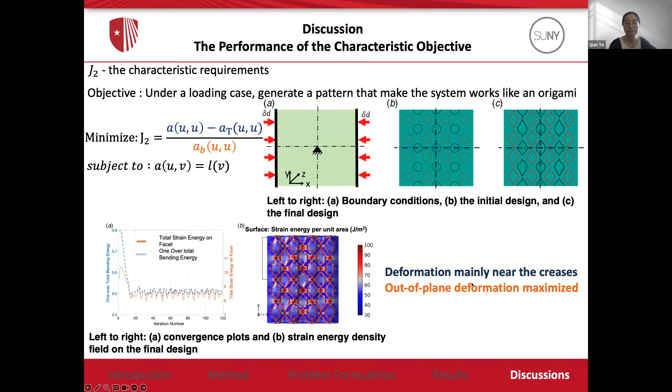To sum up, in this work we aim to provide a systematic way to model and optimize an origami-like structure to fulfill the prescribed requirements, for instance transforming force or displacement from one pole to another. The origami is modeled as shell structures, so the in-plane stretching, out-of-plane bending, and shear deformation can all be well captured.

Our whole optimization process is physics-governed. However, currently the work is based on the assumption of linear elasticity and small deformation, so in the future we will consider large nonlinear deformation.

Also in the future, by considering fabricating origami with active materials, such as ferromagnetic particles and heat-reactive polymers, the work can potentially be extended to design programmable self-folding structures. This means under a certain stimulus, it allows an automatic switch from the original status to the target shape.

Moreover, with our proposed topology optimization framework on freeform surfaces using the extended level set method, we can optimize conformal origami structures on surfaces with desired properties and kinematic performance.

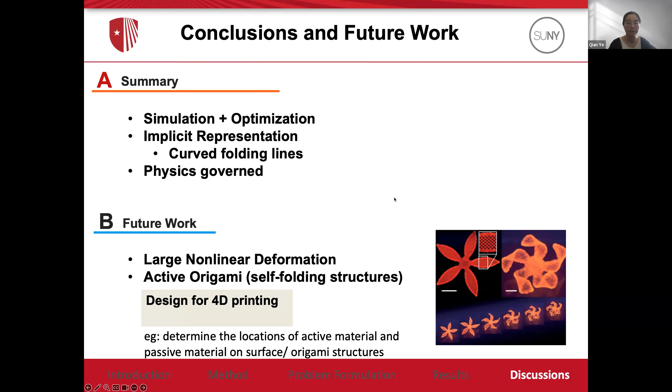Thank you very much, Qian Ye, for a very interesting presentation. Really interesting. I guess now we have some time for questions. Maybe I will ask Amy, maybe you can read...